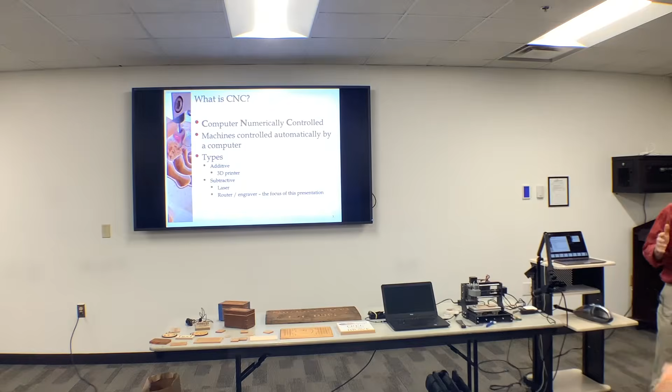So, like Paul said, CNC stands for computer numerically controlled. The technology had its infancy in the 40s and 50s in the machine tool industry, where people were trying to automate their machines. They used to do it with gear trains and all kinds of mechanisms and devices, then started using electronic actuators, including the old punch paper tape stuff used for teletype machines. As computer technology progressed, it's come around to what I'm going to show you here tonight.

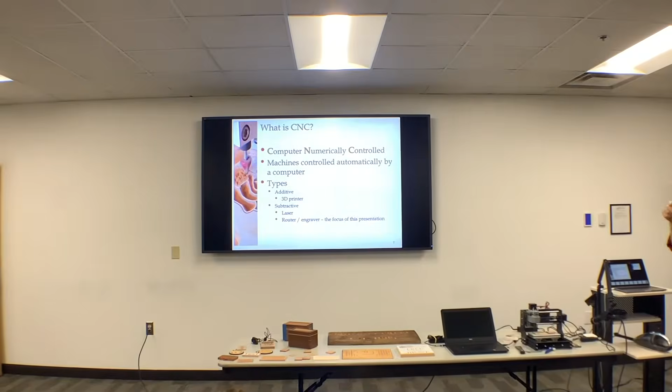So there are two types of CNC machining. One is additive, where you add material and don't take it away. That's your 3D printer, and a lot of woodworkers are using 3D printers these days.

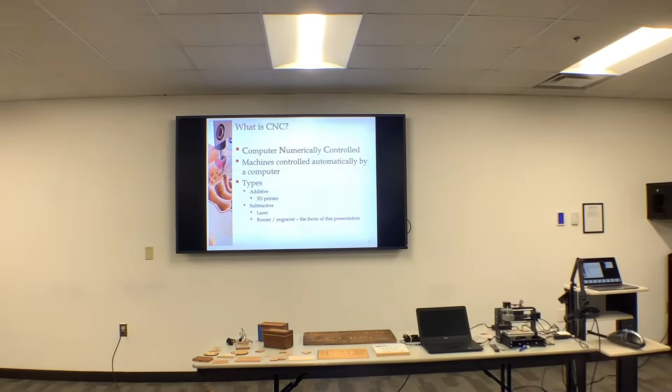The most notable example I know of—how many of you know Tony Kubalak? Tony is a phenomenal creator of period furniture replicas, true replicas, made down to the millimeter, exactly alike, with lots and lots of carving. In the past, the only way to do that was to go to a museum, take lots of photographs, stick rulers next to them so you had something to go by.

Then you'd look at them when you got home in your shop and try to create things. Well, what Tony's doing now is taking a 3D infrared scanner to a museum. He's able to do a 3D scan of the entire piece of furniture without touching it, which all the curators at the museums just love. Tony comes home, converts that into a digital file, puts it into his 3D printer, and makes a 3D printed copy of that piece of furniture, and that's what he carves from. So it's a great tool for folks like that.

And of course, opposite of additive is subtractive—that's when you're removing material.

A common hobby tool is a laser engraver. Nicholas got one for a phenomenal price of nothing, and he brought in an example tonight. I'll pass this around.

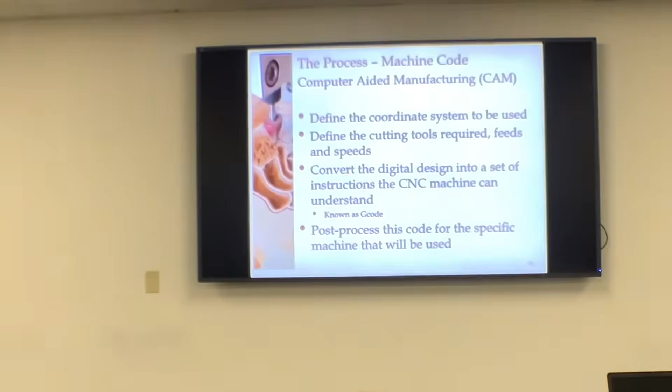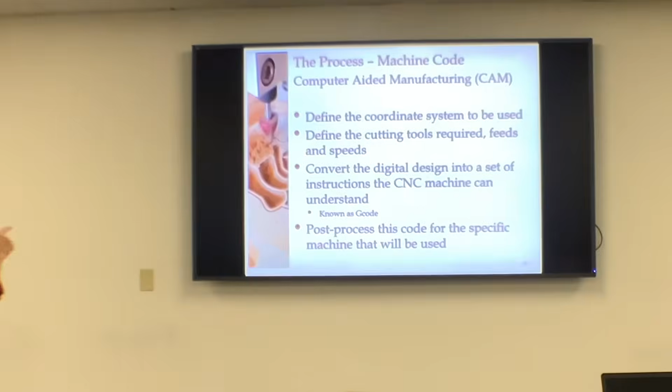Okay, so that's the first step. The first step is you have to have a digital design. It's got to be in a digital design file. Then you have to take that digital design, that file, and either feed it into a separate computer-aided manufacturing program, or most of the digital programs designed for CNC have this feature embedded in them, so you only need one program. But it's the second step that you have to do. Once you get the design done, now you have to design how this part is going to be manufactured. The very first thing you have to do is define the coordinate system.

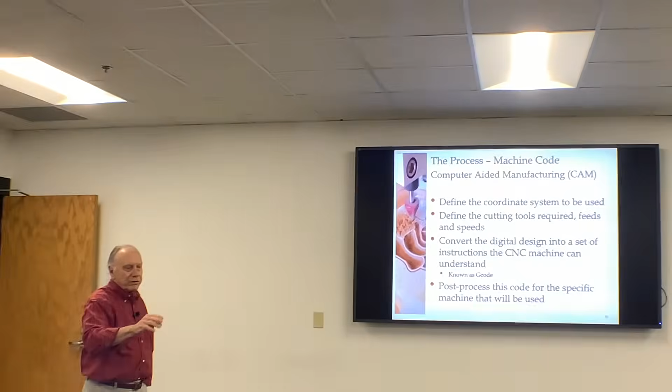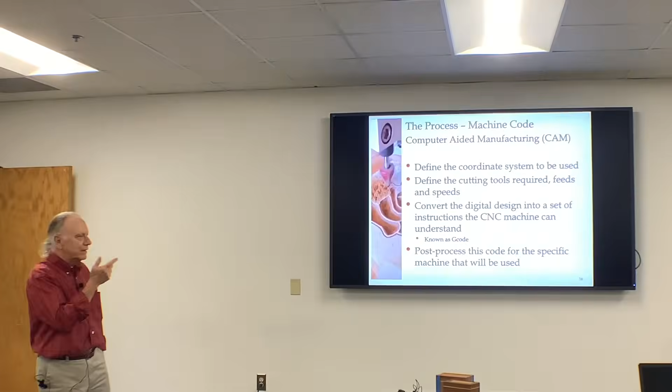And right there, that scares a lot of people away, okay? Because they remember when they were in junior high school and they had to make plots on XY paper, how confusing it was. Well, you got to get over that because you've got to work with coordinate systems. Most machines are 3 axis, X, Y, and Z, and you have to become familiar with that. So you have to define the coordinate system, develop instructions that tell the machine where is 0 in this design, because everything is referenced from that 0 point when you're cutting. I'll show you an example of some G code, you can kind of see that. Then you have to figure out what kind of cutting tools, what kind of router bits am I going to use to make this.

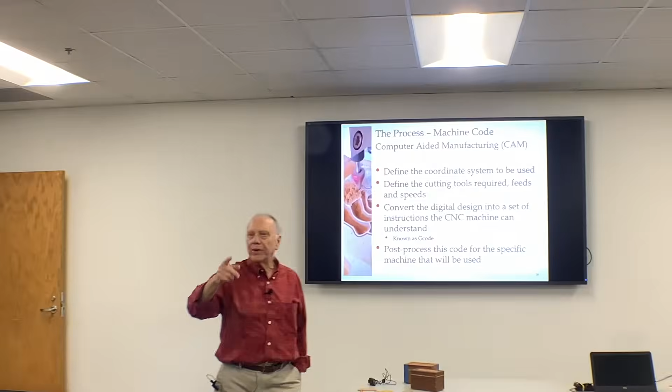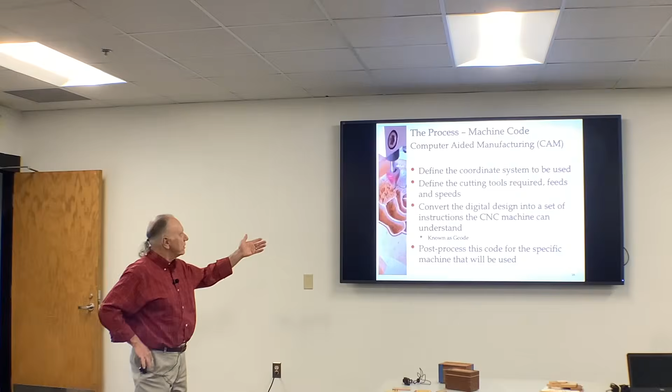For instance, if you're going to make that sign that's going around, you have to use a bit that's a V bit. If you're just going to cut out a shape like this, you could use a cylindrical bit. If you want to do a lot of 3D work, you're going to have to use a tapered ball nose bit, because if you try to do a 3D carving with a straight bit, the only thing you get is a bunch of steps. So you have to know what kind of tool you're going to use, and you have to tell that to the program.

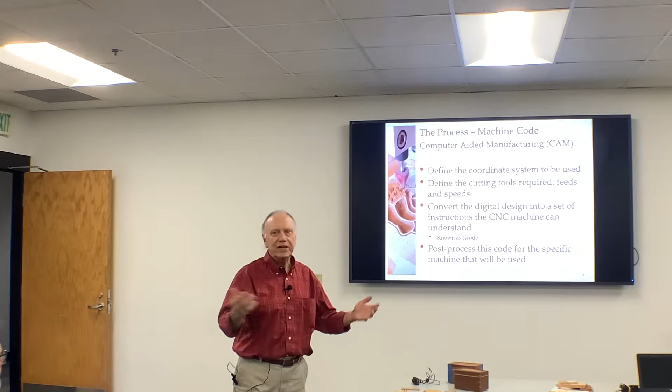You also have to figure out how fast you're going to spin that tool and how fast you're going to move it. Most programs have all that built in. You can pick the tool, and it will give you suggestions on what speeds and feeds to use. As you gain experience, you can change that however you think you want.

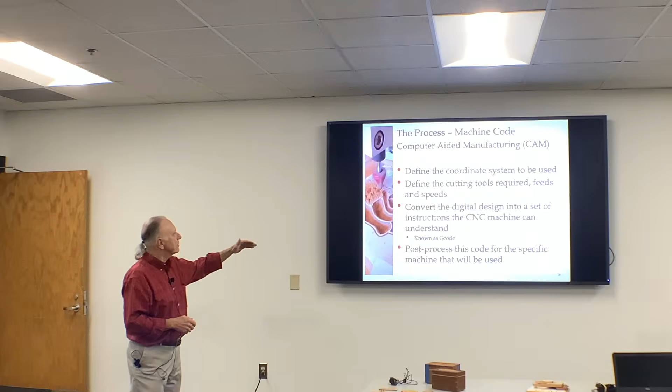Okay, so once you get that stuff decided, then you have to convert that into a set of instructions that the machine could understand, and that's called G code. I don't know what G code stands for, it's just G code. Then that program has to take that G code and process it one more time to put it in a format and style that your specific machine can understand. They're all a little different.

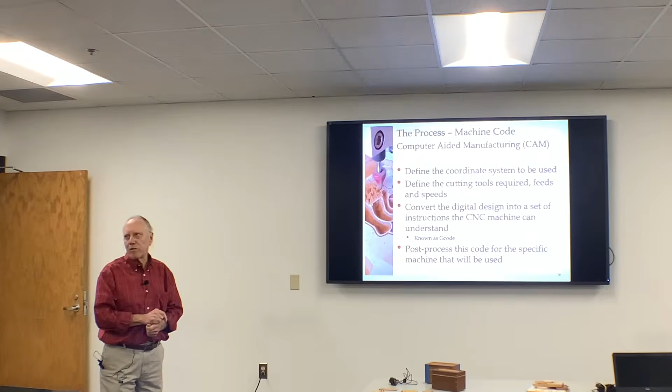And then the next step is to connect your computer to your CNC machine and use another set of software that will send that code to the machine. Now again, if you spend a lot of money on a piece of software, it's going to do all three of these things. I'll be showing you the cheap, easy way to get into this. It's with free software, and you're going to have to use more than one kind to actually finish this job.

All right, and then the process. Now you got your computer, it's plugged into the machine. Now what am I going to do? Well, you have to affix your workpiece to the machine. You can't just throw it on there and have something happen. You have to hold that piece tight somehow with mechanical fasteners. I'm going to show you a really easy way here on this little machine. We're just going to use double stick tape. But you do have to hold it down.

And then you have to go through the process of instructing the machine as to where 0 is for your design. A lot of people will default when they're making something, and they'll say okay, this is 0, everything on this plaque will be defined from this point. Sometimes that doesn't make sense. Like the little pieces I'm going to show you I'm making today, 0 is going to be in the middle, because when I want this piece finished, I want a nice even border around here, and I don't want any irregularities in the shape of this piece to mess that up. So I'll define 0 as at the middle.

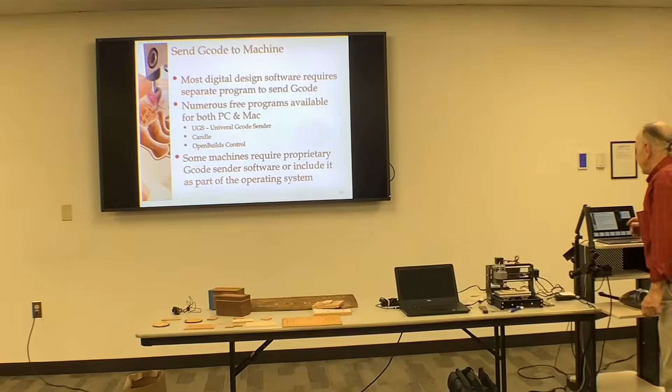So that G-code then is sent to the machine. And I mentioned earlier, you usually need a separate program to do that unless you buy one of the expensive commercial things. Three of the most common free programs, which you can use on both a PC and a Mac.

UGS, Universal G-Code Sender, I'll show you that running here tonight. There's another one called Candle, and if you happen to buy this little machine here, it comes with that, which runs—oh, that one only runs on Windows, I'm sorry. And then there's a crowdsourced program called Open Builds Control, and you can get that on both Mac and Windows, and it used to be called Bob's CNC. Bob and his buddy went out of business, and now Open Builds just runs that.

But all of those will send the G-code to the machine, and they all have different interfaces. You operate them differently, but they all get the same job done.

And as I mentioned, some machines require a proprietary G-code sender. Paul, your Onefinity, what does that take? So the Onefinity and most of the bigger machines have their own built-in controller. So you take your G-code file and you load it into the controller on the machine, and then it runs it. So the Onefinity has a couple of options. It either has a Buildbotics, which is an Arduino, or the Masso, or now they have a third controller. But most of the bigger machines have their own controller that you can actually watch what it's doing instead of feeding it. And a lot of the other machines have their own controllers too.

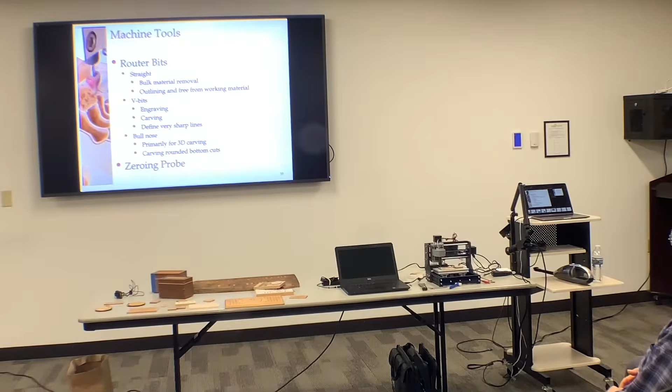Okay, we'll talk a little bit about router bits. There's 3 basic types: straight bits, V bits, and ball nose bits. Straight bits you use for bulk material removal and for running outlines and free from working material, to free parts from the working material.

Well, okay, this sign was made exclusively with a 1/4-inch round flat router bit. And that's why I picked this text, because I could run this text with one bit and not have to do any bit changing. I didn't want to spend that much time on it.

And then there's V bits. Use those for engraving. In order to engrave this little thing here, I just use a little pointy bit. It's a 30-degree V, very sharp, and it only penetrates when you set up your machining code. You tell it how deep you want it to cut. Obviously, if you're cutting with a V bit, the deeper you cut, the wider the lines are going to be. So you just do this a little bit.

In this particular case, what I did, I took this maple and finished it with shellac first, and then I engraved it, and then I took acrylic paint and filled it in. The acrylic paint wouldn't stick to the shellac—it only stuck to the native wood that got engraved out, so it works out really nice. You can see it easy.

So that's what you use for carving the sign over there. And like I mentioned earlier, the advantage of a V bit when you're carving is you can carve a line that's infinitely thin if the bit gets raised up. When you use your software, they all have something called a V-carve mode, and it will figure out how to cut all the material out of that letter and bring the bit up at the right point to make all the fine detail that you've defined.